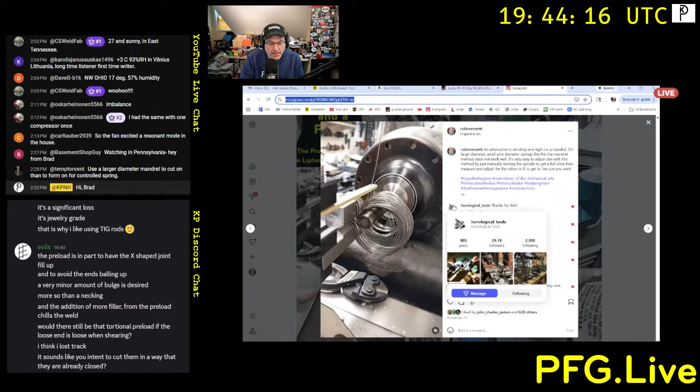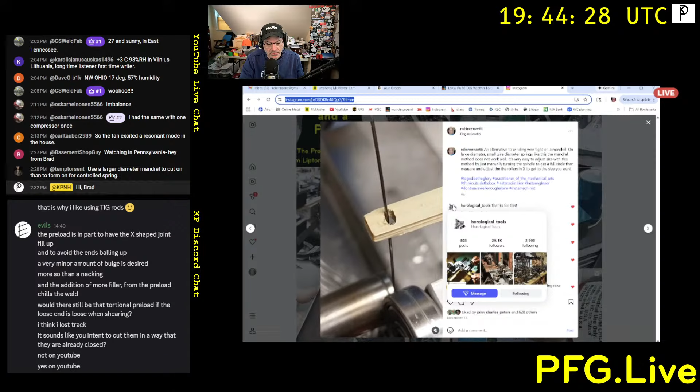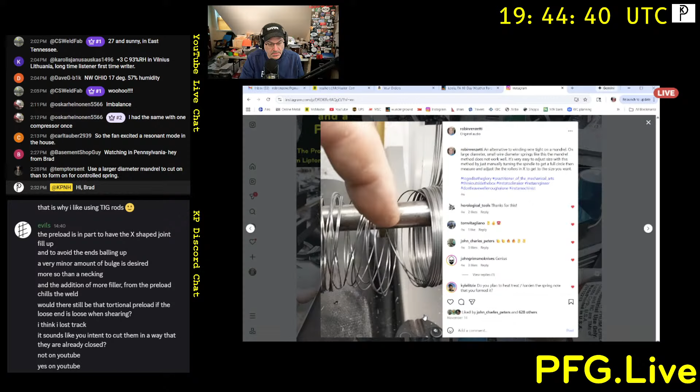Okay, so you see the two ball bearing rollers, there's the guide. That guide you would adjust axially back and forth for the angle the wire comes into, and you see the groove in the mandrel for traction, and the amount of X position that you have. Matter of fact, I probably could just turn the audio on. So, that's the finished coils, right? Yeah, there we go. Yes, and they are intentionally that big.

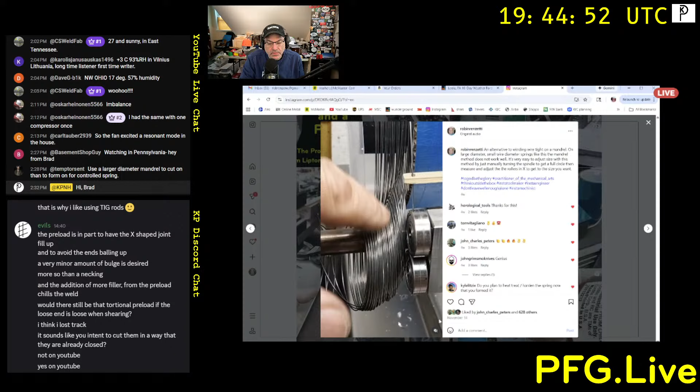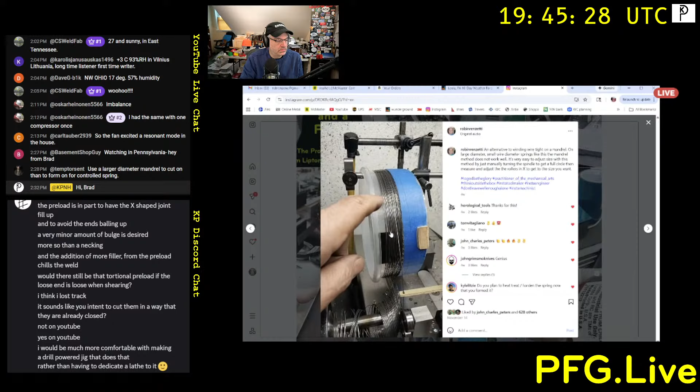And what's the date? That's November, I can't quite read it. What's the date on your post? I don't know, oh, November 14th, it says there. So November 14th in Robin's Instagram feed is the post, it's at the very top. You'll see this, and there you can see the big circular bucket piece there. That's what I did to unwind the wire off the tight spool as it came, but maintained its orientation. I didn't let the wire twist or do anything crazy. That's the relaxed coil right there. That's the relaxed coil, that's where it is without having any, that's the diameter it wants to be roughly.

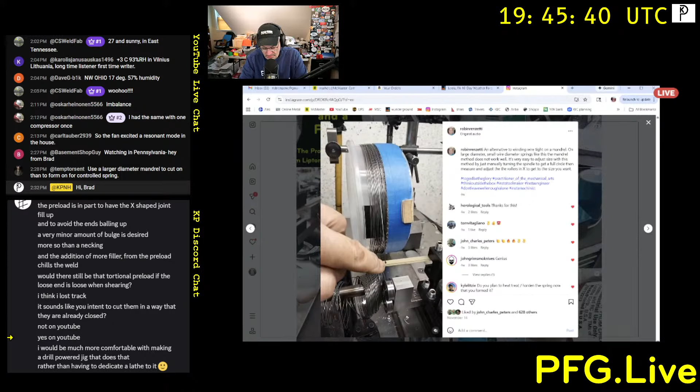And then that allowed me to keep that orientation going through the rollers properly. You can see if you look down the rings on the chuck there that are all wonky compared to the ones stacked up—those wonky ones were before I was controlling all those things directly. But once I got that lined up and consistent, it just laid down beautifully. But you'd go berserk trying to wind on a mandrel and get a controlled diameter with wire.

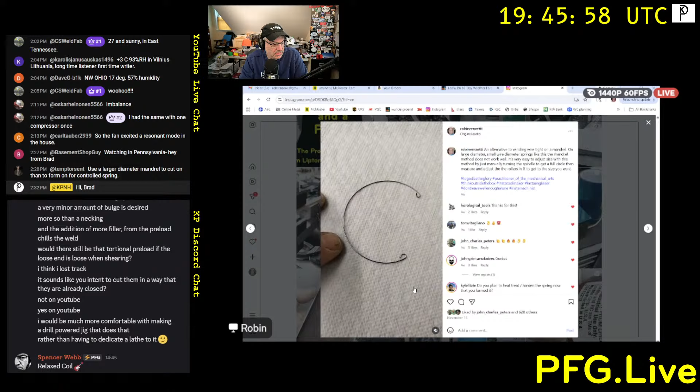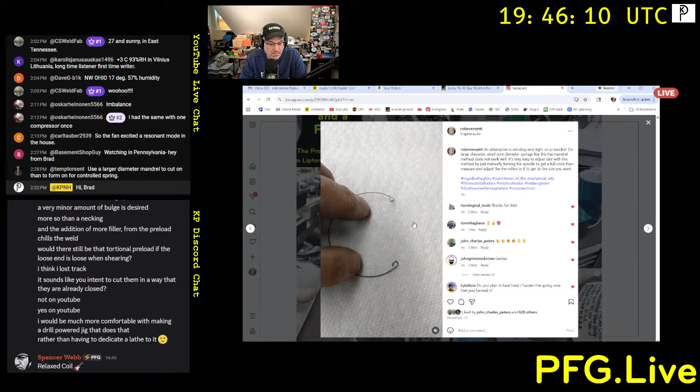What was the wire? Here, what was the wire in this case? This is tempered music wire. Okay, so super springy. Yep, super springy. It's a 26 diameter, 26 thousandths of an inch music wire. But that gives you the stuff that'll poke right through your finger without even trying.

Yeah, that's it. Okay, I'm going to unshare here, come back and unshare here. That's pretty cool. Now, the wire diameter to ring diameter is significantly different in that example, so there's some other forces involved.

Yes, so for chainmail, the idea is to end up with a flexible mail that's literally like cloth, almost, and has small gaps through it that little pokey knife-type things don't go through, but still maintains its flexibility. So it's pretty severe forming, actually, in terms of the diameter OD/ID ratio.

So if he said 2 millimeter wire, 80 thousandths wire, that's pretty small wire actually. And 10 millimeter ID, I think. Was that the 10 millimeter mandrel? So less than or equal to 10 millimeter mandrel, less than or equal to 2 millimeter wire.

So what was the finished ring size? Yeah, what did that come out? ID/OD. Evils, just give us the ring, desired finished ring target.

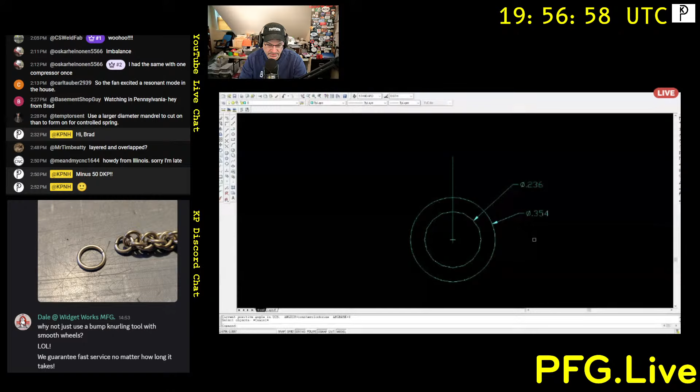These two circles represent the mandrel and the wire wound around the mandrel. Everybody following that? So the 236 is the mandrel, and the 354 is the OD of the ring, right? Okay.

So what do I want to do here? I want a nice... yeah, that's not out of the question here. So let's move that, just a bit outside. Okay.

Rotate. Let's see if two of those fit in there. So this is the... yeah, okay, that's not bad.

All right, so what we got here is you got your mandrel, and then you got your wire diameter, and then this might be a couple of ball bearings here. And these happen to be a half inch OD, right? Which is a pretty substantial bearing, more than, and these are oriented 45 degrees to the mandrel. And so what we would do is the mandrel would be on the spindle center line, and these would be on the x-axis, so that we can control their position in relation to the mandrel.

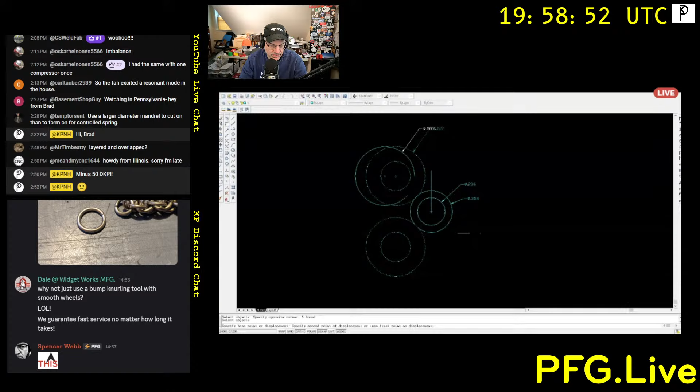Right, I show them tangent right now. You would probably not be that close. So that's totally doable geometry-wise, and those are sturdy enough bearings to do that. And then the wire would come in from this direction here.

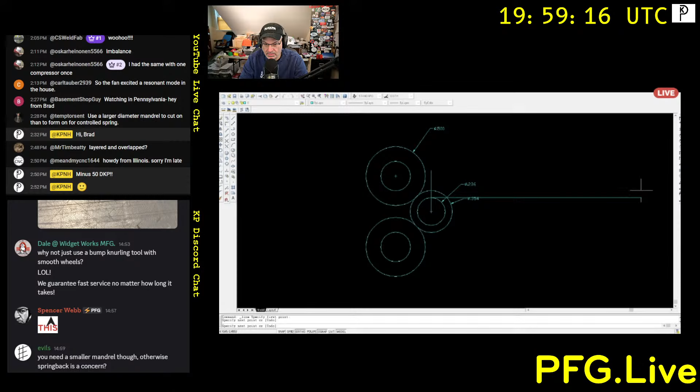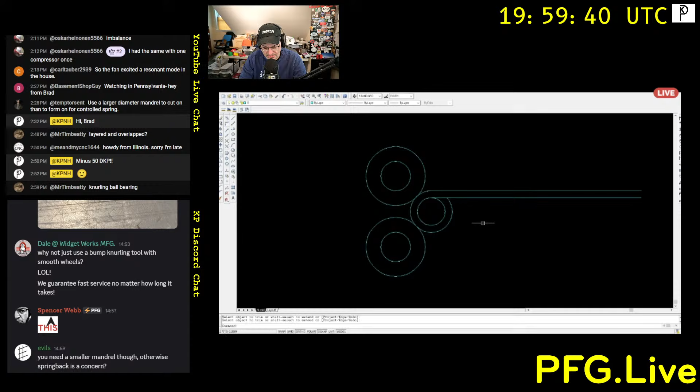Mr. Timbeatty likens it to a knurling tool. Yeah, kind of like a knurling setup, right? Clean this up a little bit, get rid of some of this stuff. Yeah, right? It looks good. So, yeah, you'd have to have a stubby little mandrel though. But I think that's okay, I think that's okay.

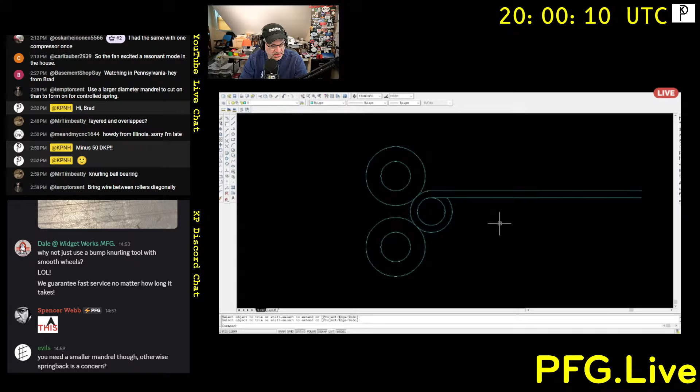And then you just have to introduce a helix into it so that it comes off the mandrel out into airspace, right? temptorsent says bring wire between rollers diagonally. I think if I'm reading it right, he's talking about inducing the helix. Well, that would be in a different plane. You would introduce the helix in the plane that's directly into the screen, right? That's the helix direction.

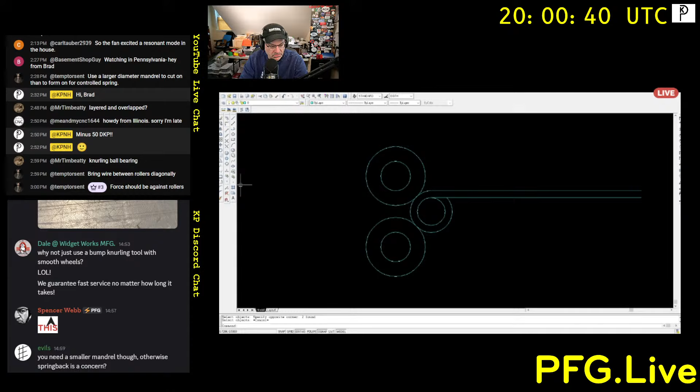That's pretty small stuff. Well, let's see. No, so what Robin's saying though is outside of this mandrel, you can have your shearing element, right? So let's zoom in on that a little bit. So let's draw a line from the center of that. And what do we want here? So let's say we want the shear line to be on the center line, right? That's where I would put it, if possible.

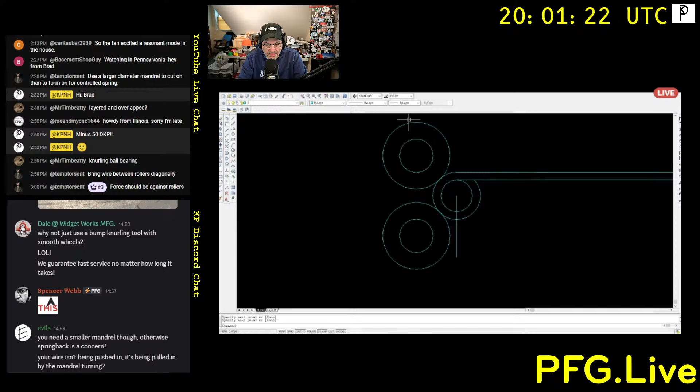Let's set that. Let's say it's 100 thousandths thick just to make it durable. Ooh, that's pretty thick. But it doesn't really matter, does it? It doesn't really matter.

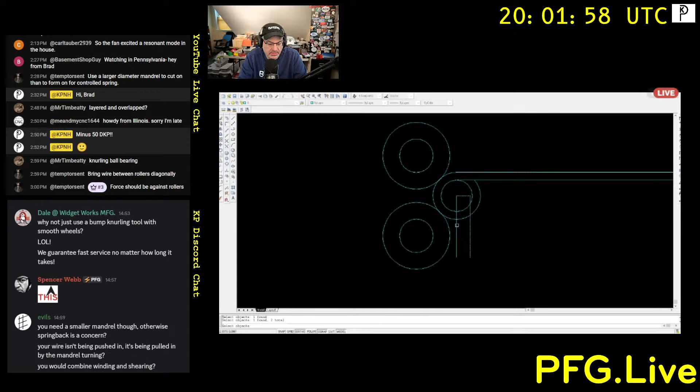That would. I'm gonna see what Robin comes up with here. So if this thing is...

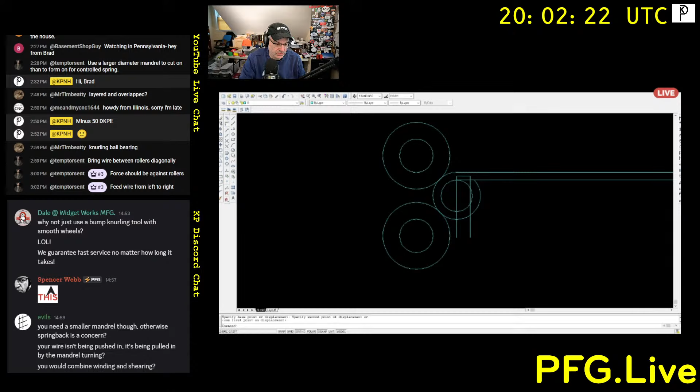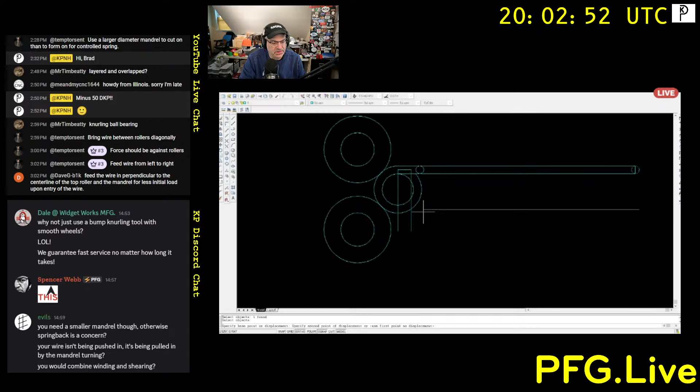Dave G says: feed the wire in perpendicular to the center line of the top roller and the mandrel for less initial load upon entry of the wire.

A little thinner there.

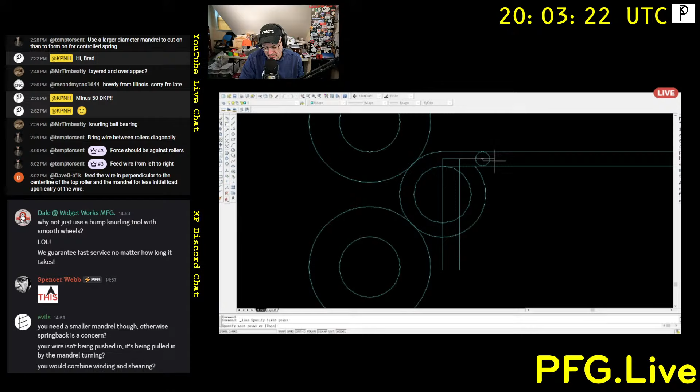I'm reminded of a quote that appears often in the Kinetic Precision Discord: we do these things not because they are easy, but because we thought they would be easy.

So yeah, that's not gonna work. But you can't—if this is the shearing element here, you can't have that come to a sharp corner like that.

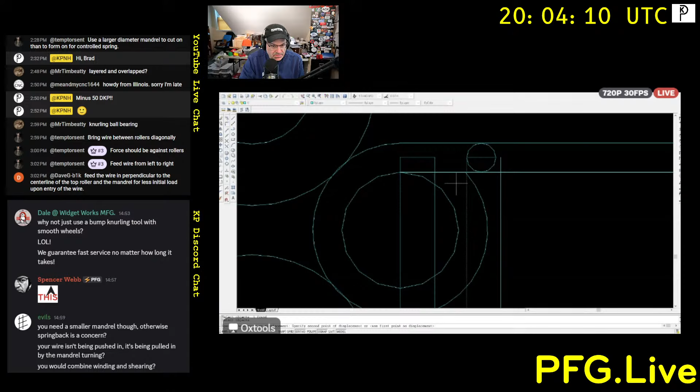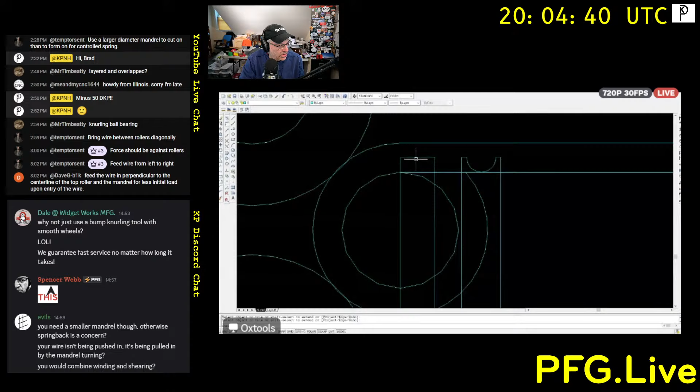I've got it. If the shear tool... when we're done. Yeah, okay. Well, I'm sort of doing one here de facto, just to think about it. Let's trim that real quick, get rid of that. So that would be your shear tool there, and this is rotated 90 degrees. So that's this rotated 90 degrees.

All right, let's see what Robin's got here. Let me get out of here. Come back. And not shear. Go ahead, Robin.

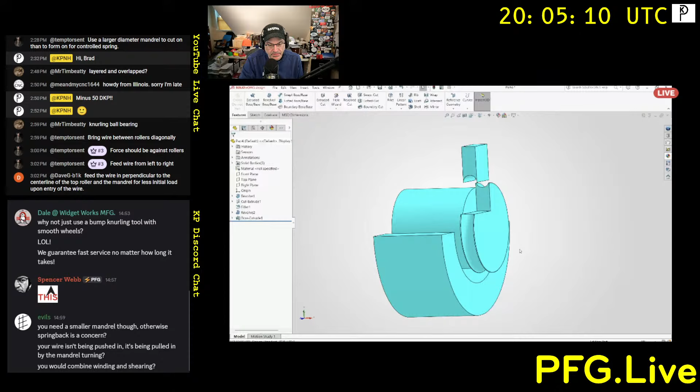You saying the SolidWorks screen? Yeah, but mine is tiny, so let me click on that. Yep, you're up. Okay, so this is the... I'm going to hide—oh yeah, this, okay, I'm going to hide like this that body here.

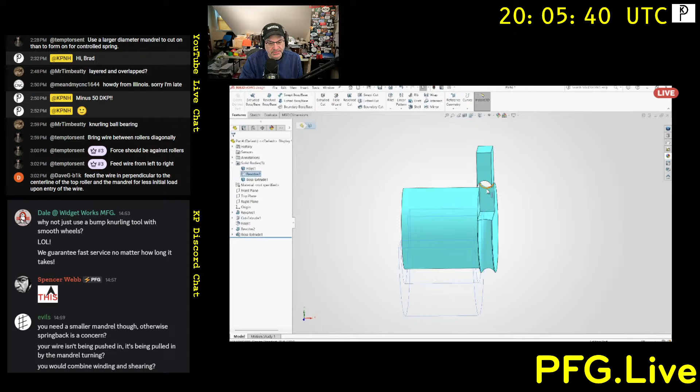Okay, this is the inner piece, and this diameter to the left is the ID of the wound spring, slip fit, and then the radius of the groove that's in that is tangent to that at the bottom, and it's the same size as the wire.

And then the punch piece is obviously held in place rigidly to be able to shear across here. And ideally this would probably be also curved. So instead of this being a straight cut through, we would wrap it around, not necessarily at the OD, but something that gave a little more support to deform the wire less, hitting on a little bit larger area. Right, so it doesn't bend that one end, right?

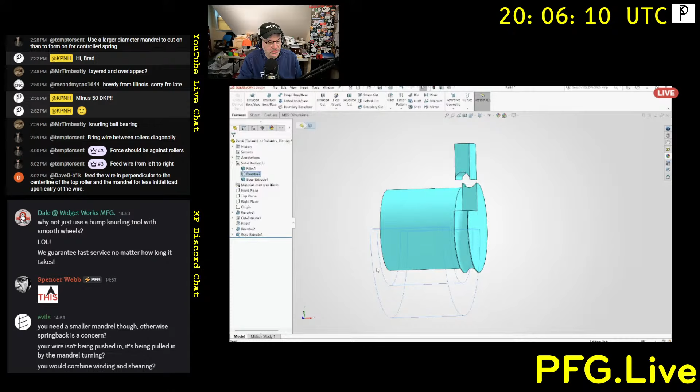Yeah, right. And I'll turn this back on and go to section mode here. So you can see here, this gap at the bottom here between this outer piece at the bottom is so that the loads of pressing down and shearing this are helped by the wire touching OD and ID in this outer cradle that cradles the wire for 180 degrees. So this transfers the load across, or whatever.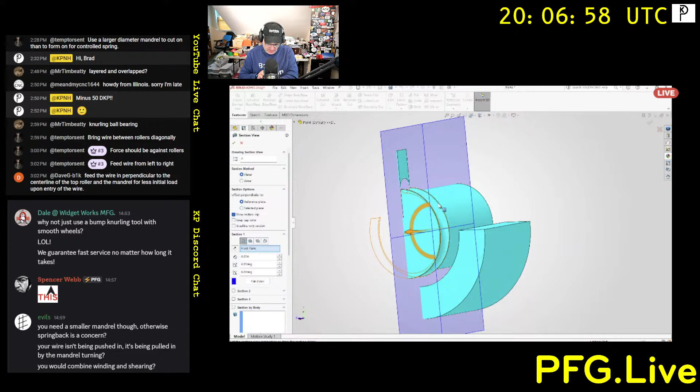Right, yeah, across there so that you're not stressing this pin. This pin can be longer now so that a longer piece can go in here, and you would just keep sliding off. Now, obviously, we would remove this lip here on the back substantially. Yeah, so the ring can come off easy, right? Right, so it can just snap over and come into here and then get snapped off.

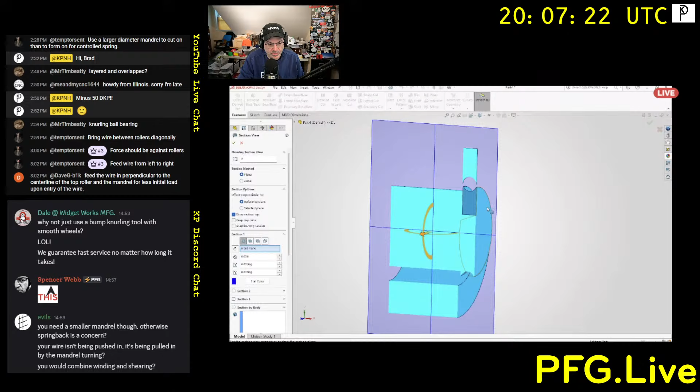And in theory, if we put enough preload—meaning the winding preload—such that the wire, when cut in this fashion, actually snaps in place or darn close to it, that would be pretty sweet if that could be made to happen.

So there you go. Yeah, we have some questions coming in. Okay.

Evils is asking: how is the punch piece held? How is the cut ring ejected? It needs a stop to set the overlap. How is this tool sharpened? He's getting ahead of us. Could you clarify? Go ahead.

All three pieces are held—probably the bottom section would be a piece with a hole in it that the centerpiece with the notch in it inserts into. So you'd put a section of spring, whatever length is practical, let's say it's 2 inches. You would slide that in. This entire bottom piece would be that length. The bottom U-shaped 180-degree piece would be that shape, and it would actually be a full block with just that shape in it.

That block would be rigidly mounted in a die set—the die set meaning something that physically holds whatever you're bolting to it, upper and lower, in alignment. The upper punch piece at the top would literally be placed in alignment in the punch press to set the actual cutting clearance there, where those two meet together. And this is something where you aren't adjusting overlap on this. This is cutting rings with hopefully a perfect, reasonably perfect, zero gap and zero preload.

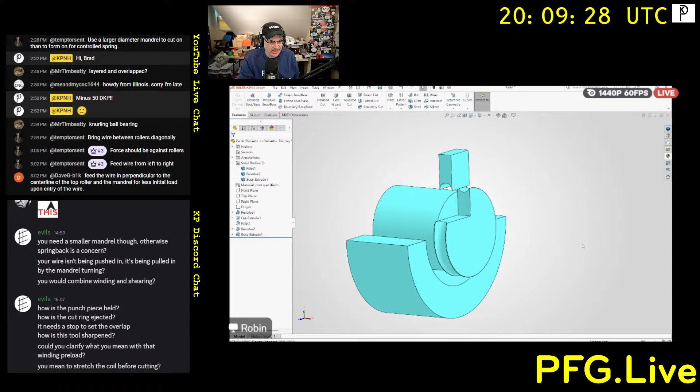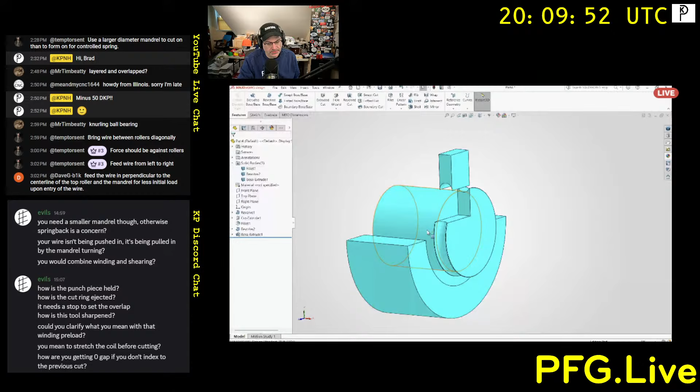I'm going to get rid of this. I'm going to isolate this piece if I can here, isolate that, and come back here and get rid of this so you can see what this would probably look like. So we'll convert these.

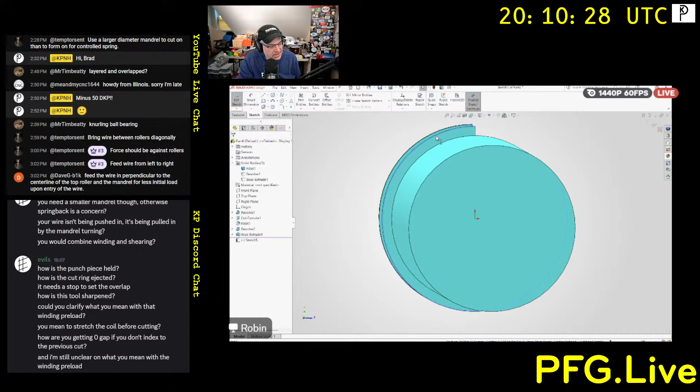Oh, did I? Yeah, I'm on there. Robin is working in SolidWorks. Ox Tools is working in... there we go. Okay, now come here, convert as... oh, you kidding me? I am no way out of memory. You are delusional. We'll get back to you. Meanwhile,

What was the CAD software you were using, Ox? That was just AutoCAD there. I learned CAD on AutoCAD, so I'm pretty comfortable for quick initial layouts and sketches in that tool, and then sometimes I'll move from there into SolidWorks depending on the problem. But it's just a matter of how I got trained.

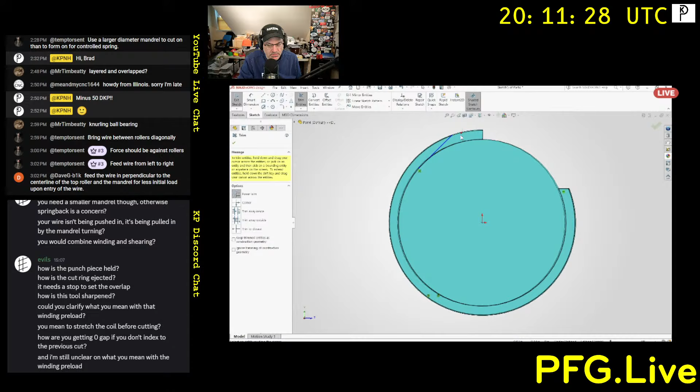Sorry. Oh, he's back. He's back. There we go, there we go. And so.

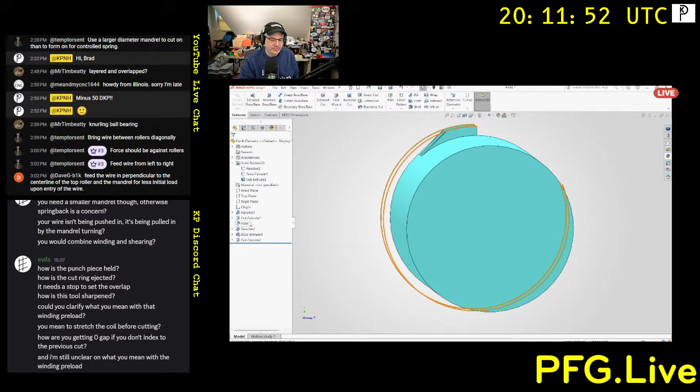I keep thinking about those spring winding machines and how they shear the finished spring off in a lot of cases. If you're going to weld them, you might not need a curved shearing tool, but that's harder to make.

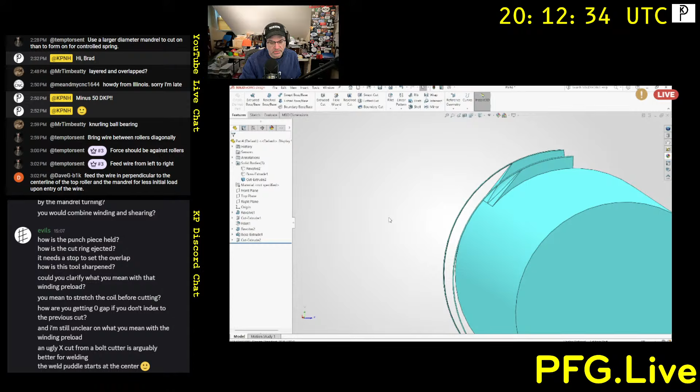There we go. I wish I had a spring in front of me here. So I'm looking around my office. Why is that still there? Oh, I know why, duh.

Anyhow, I'm not going to waste our time here. Basically that would be removed, and I'll isolate here. So the only section that would be necessary is right here. This would still clear the spring all the way around, and that's where it would cut.

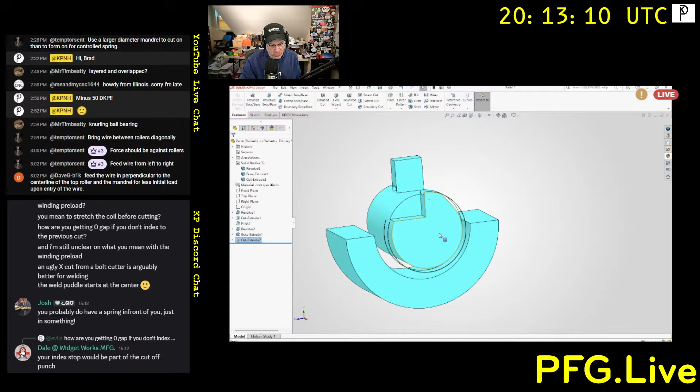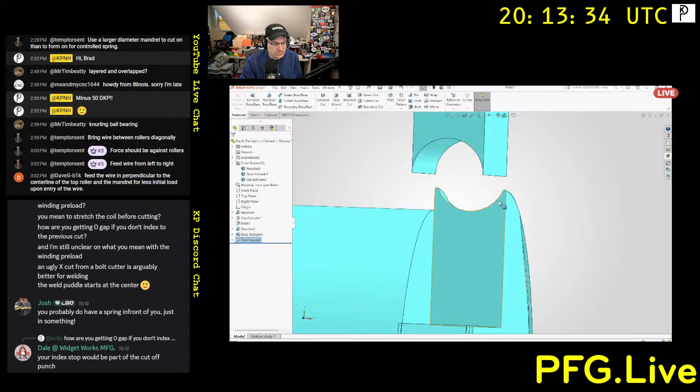And this would get pushed off when you push the next one on, pushing that one out of the groove. Lots of things would need to be tuned, like this radius at the lip here would have to be adjusted, probably larger than it is now, because this is liable to pop out. These walls might need to be tapered out on an angle to give more support from the lateral squash. So there's lots of die things that would need to be tuned to make that function, but that's the general idea.

So Evils, how are you cutting them now? What is your cutting method? Evils says Knipex CoBolt, which is okay. So he's cutting them with diagonal cutters or something like that. Correct.

I think I have a pair of pliers that I've ground that basically accomplish the same setup I'm talking about, using them for snipping. It's amazing, I was having the same thought: how would I modify a pair of regular pliers to do this, right? I'm gonna go look through my drawer. Yeah, exactly, okay.

And you could probably, if you found the right nippers, grind some of these features into them to make a clean shear like that. Feed the coil into it though. So what do you got there? Oh, there we go. These are regular wire cutters. Yep, just been trimmed off, but that's the action that you want. You want that full circle action, the enveloping action, like that.

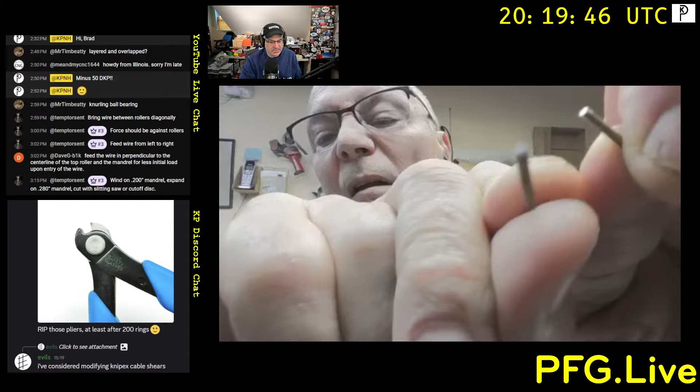Hardwire cutters, yeah there you go. So Channellock made some special cutters for large diameter hard wire, I believe, and they have very, very short, stiff jaws. Let's see if I can find it.

Robin, did you just cut those? Yep, I just got that. Yeah, that was amazingly clean, very nice and flat, and you can see the... let's see if I can... yep, there, that's certainly weldable. There's no actual smear or anything. That actually worked pretty good, very nice.

So Josh posted a picture. Are those the Channellocks, Josh? I think those are cable cutters there, but it's close.

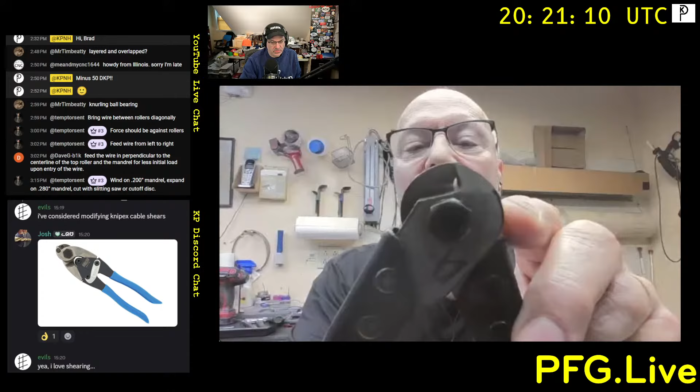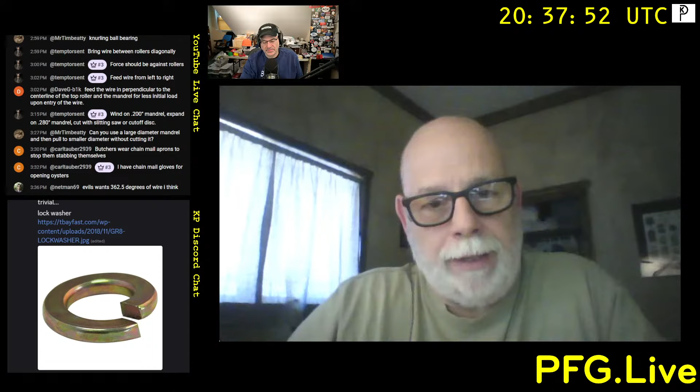But that's functionally what a chainmail ring looks like, except it's a round cross section instead, and you twist those two ends. So there's something else to study on YouTube—search how they make split lock washers like that, because this is exactly what we're talking about, just a different cross section. So they're winding rectangular wire, probably the same way we're discussing.

I don't think they're winding those on a mandrel—that wouldn't make any sense. And those are clearly sheared, though. I wonder—I see quite a few spring winding machine demos on Instagram, and you see it squirting the wire out with different fingers, or whatever they're called, that come up and interfere with the wire. In this case, they'd be squirting rectangular wire out, and a finger forces it to bend and curls it around. But then all of them have a shear tool that goes right across the face of where the stuff's exiting and pops it right off. That's probably how those are done.

The amount of—those are wound with no preload, as would be considered for a tension spring. We're thinking that if, at the entrance of the wire, when we talked about the roller setup, angling the entrance of that wire until when you cut them, it almost flattens out because it's got that much preload where it wants to come back and lay flat inherently. D-helix, you mean? Yeah, D-helix, because it's wound where it's pressing on itself—that preload is the axial preload force on a tension spring.

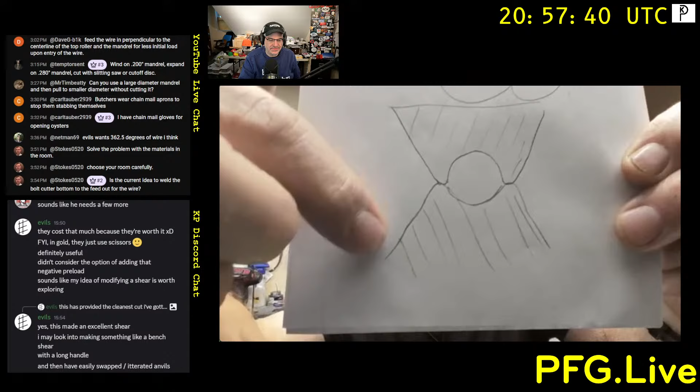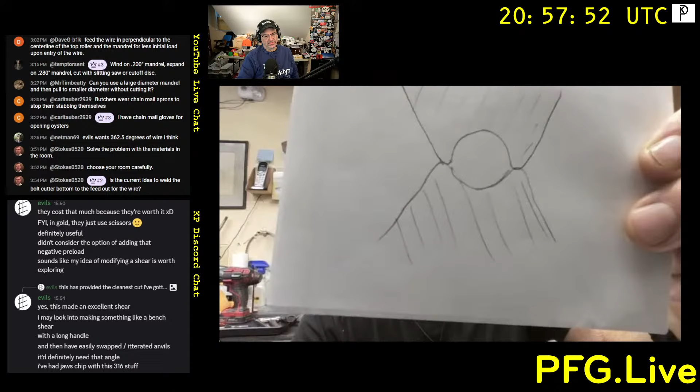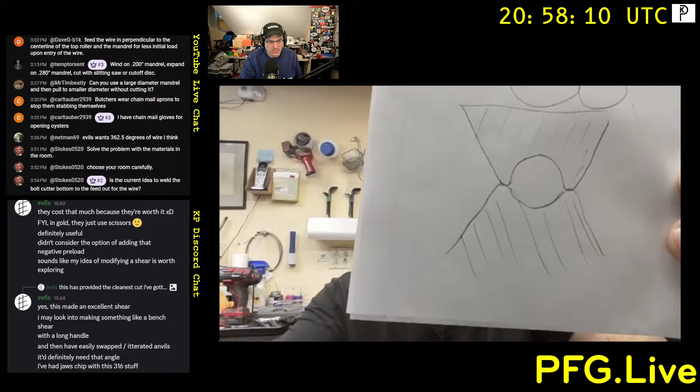So the little side angles on here. Yeah, they support those corners. So I'm pointing to the part there. These are probably should be a little shallower than that, so that they can kind of just separate the wires without doing a lot of damage. But obviously I'm showing a cross section where they meet, because that's where they meet, but they're going to go completely past one another. But that's an example of what you would do. And this is something where you just take a Dremel tool and some diamond tapered mandrels to do the holes, size them. With medium skills you could grind that up and give it a whack, pretty easily, pretty quick.

Awesome. Well, does anybody in the audience have any questions? I think Evils is typing. We'll take some more questions.

I think it's important to point out that we got to observe a lot of process here. This was not an obvious problem, and you guys attacked it from a bunch of interesting angles. I think it's that process that's important to learn from. But I would say it was constrained in some way, because this is not necessarily how Robin and I would attack this problem. If we were sitting in the same room together in a shop, I'm sure we would have built something, put something into the vise, modified a pair of pliers, or pulled some wire out—there would have been some physical action if we were in the shop environment.

Right, we'd be bouncing between the computer, a scratch pad, and something in the shop to attack a problem like this. And what does it actually take to form that wire? What kind of edge do you get when you just shear it with this? And hey, do you have a chisel that we can grind a little mouse hole into, or whatever, and try that?